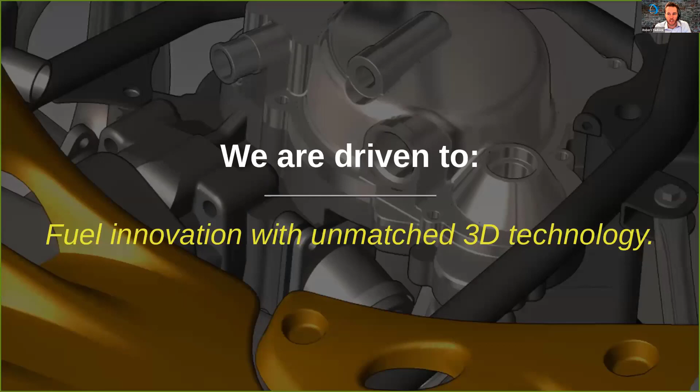A little background on TechSoft 3D: it's a group of passionate people, and we're pretty driven to fuel innovation with unmatched 3D technology. We do this by providing tools, expertise in various markets, and a tightly coupled partnership for each of our customers. Today we're going to be walking through building a simple web application with one of these tools, the Hoops web platform.

A quick note about the agenda: this is going to be a presenter-led training. We're going to pop up some exercises on the screen. You should have been granted access to the exercises before the call, and we're going to spend as little time as possible on slides. We're going to go over what you should expect from the session, and prerequisites if you plan on participating in the exercises.

We're going to do a quick introduction to the Hoops web platform, then a deeper overview of Hoops Communicator. We'll jump into the exercises, and any questions you didn't get to ask during the chat, we will circle back and answer at the end. Then we'll talk about next steps, or what I recommend you do from here.

As Jonathan mentioned, I'm going to shoot for about 45 minutes, plus or minus. We'll do as many of the exercises as we can, but by the time we get far enough along, it'll be pretty clear how you finish the exercises if you'd like to finish on your own.

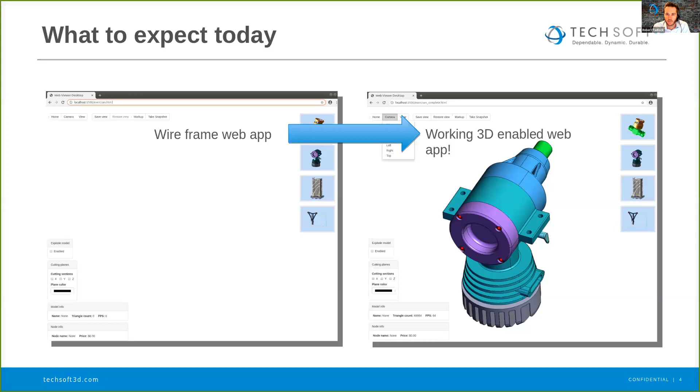So if you want to follow along, you're going to need a few things. You're going to need some kind of text editor or IDE for coding. You can use whatever you'd like, Notepad++, Visual Studio, Sublime Text, anything like that. I will be using VS Code personally, so that's what you'll be seeing. You'll need a web server of some sort, could be Apache, Nginx, IIS, some type of development server. There's a ton of them out there, Node.js. I personally will be using a plugin to Visual Studio Code, and I'll just turn that on at the beginning of the session, and it will be serving up the pages that we create.

And then you're going to want the latest version of Hoops Communicator, which you can get by following the link in the slides we'll be providing after, or the email sent to you before this talk has all of these links as well. And then last, you'll want the included exercises. These are some training materials we've built a few years ago, and also included with that is a VS Code project to get up and running, because there are some setup things you need to do to get Visual Studio Code working with Hoops Communicator.

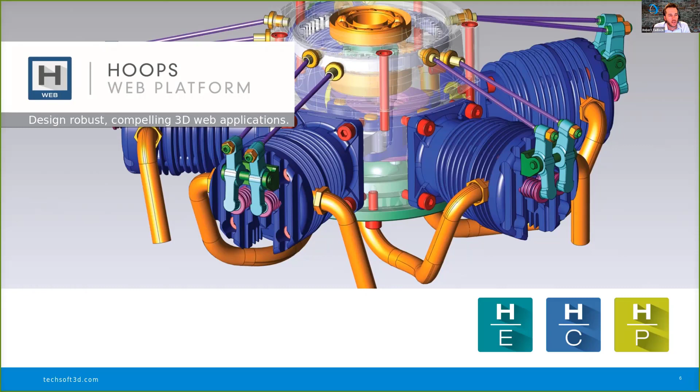So what is Hoops Communicator? This is included in the Hoops web platform, and it's the tool that allows users to author data into our online streaming file format called Stream Cache. You can either do direct authoring via a library that allows you to author the Stream Cache files directly without going through any kind of import process. This may be useful if you've got an application with your own proprietary file format, you can still author that directly into Hoops Communicator. We also offer the ability to import 30+ file formats via Hoops Exchange into Hoops Communicator Stream Cache.

The second part of Hoops Communicator is model visualization. So once you get that data imported into the tool, then you need a way to view it and interact with it, and that's the web viewer. That can be accomplished in two ways: direct file loading, where you can request these files over HTTP directly, pull down the entire file and view it in the browser, with no server requirements there.

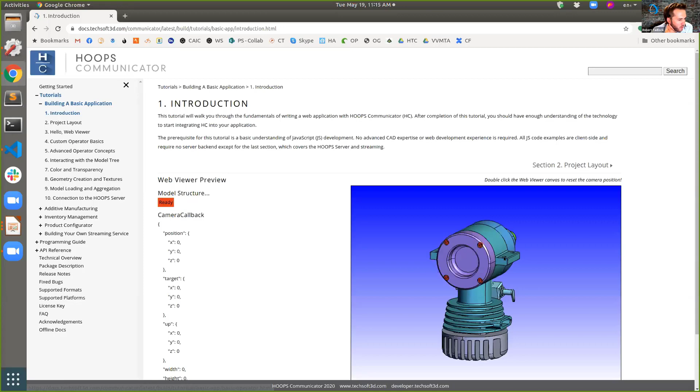Some of them have Communicator running right in them, and some are market vertical oriented, like additive manufacturing. We deliver all of this as source code, and you can work through these. You can use the code in your application, or use it for learning and training. So if you're thinking about building a new application, evaluating Hoops Communicator, or you're a current partner starting to work on that, have a look at these tutorials.

They're pretty useful. Then there's the programming guide here, and we're going to focus on that for a moment.

Communicator is broken down into really 3 logical chunks. We talked a little bit about the servers, the viewing, and the data import. And when we look at the package in just a second, you're going to notice we lay out the package in the same way. So depending on what you're doing, you can ask yourself, what part of the package am I in? What part of the components am I looking at? That can help guide you to the right area of the documentation.

So it's like, am I working with converter? I'm doing data import. Okay, we come over here to data import, and we see CAD conversion or authoring, which is what I mentioned earlier. Most users are going to be in the CAD conversion here, using the CAD conversion application, which we call converter.exe. This is an application that runs and allows you to specify a number of options.

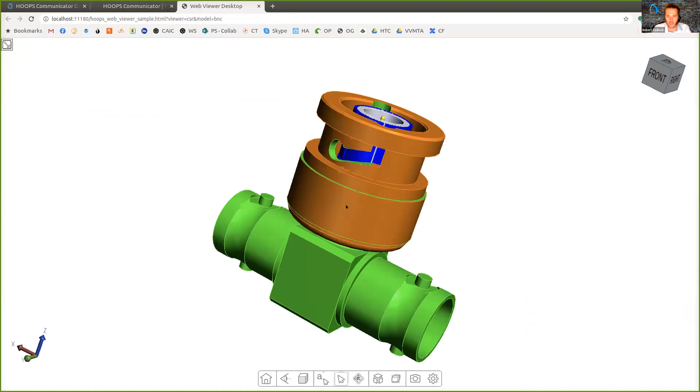So what you do from the QuickStart is we come to the index. If you open this up, you'll see we've got a bunch of different files here we can load. Anybody who's been around TechSoft for the last 20 years knows about BNC, so let's load the BNC connector, and we are now viewing this model. I'm interacting with it, selecting things. This is kind of a sample web viewer that we ship.

So you're free to use this application, use the code in here, these UI elements, all of that. There's a sample model browser in here, and that's what you're seeing here.

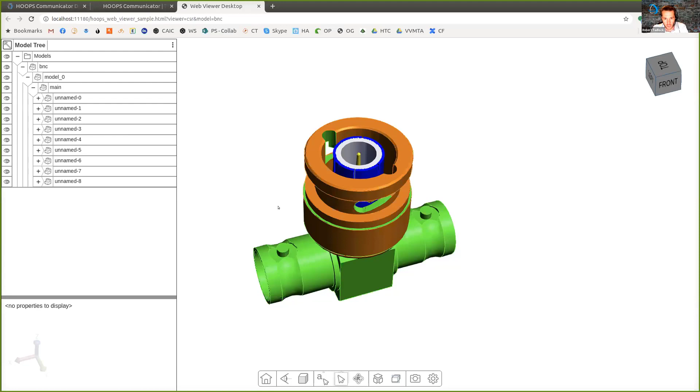What's nice about the QuickStart here is it's completely self-contained. When you start this up, we ship a small web app, web server. It's running the Hoops server, and as you access and load files, it's starting up streaming cache instances for you, and you're connecting to those. So this is the quickest way to get started with Communicator once you've got the package downloaded and installed. You come in here, you start the server up, and you can start poking around.

So there's a number of different files here. You can see PMI, you can load SCS or streaming. You can do server-side rendering as well, which I haven't mentioned yet, but to do that you have to have a GPU-enabled device. And then down here are some nice little sample code bites that you can consume.

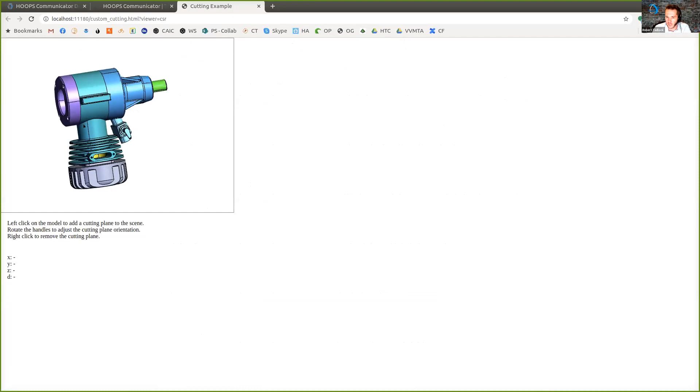What's nice about these is they are really small little bits of code. They're easy to read through, easy to understand. So like this one shows you how to use cutting planes, right? What's nice is you could just come in and grab sample code out of these and include them in your application.

And you can use the QuickStart to kind of come through the library and say, oh, what do I need to do? Do I want to do instancing, model switching? How do I do a basic minimal web viewer, right? And then we just provide you that code. So pretty straightforward, it's nice.

So what we're going to be doing today, and the reason I spent a little bit of time on the QuickStart, is the training that was provided to you - you just drop directly into this QuickStart here. So when you drop that in, some JavaScript files will get dropped in here, and also you'll see this exercise file, this microengine.json file, which we're using as like a mock database.

There's a README as well that shows you how to get this all up and running. It basically tells you to drop everything into wherever you installed it, and then once you've done that, you can come to the exercise folder. We'll do that in just a second.

So if we've got the QuickStart running, let me come back here. If I'm moving too quickly, just let Jonathan know, and if there's questions, please let him know. But you see, I still have this running.

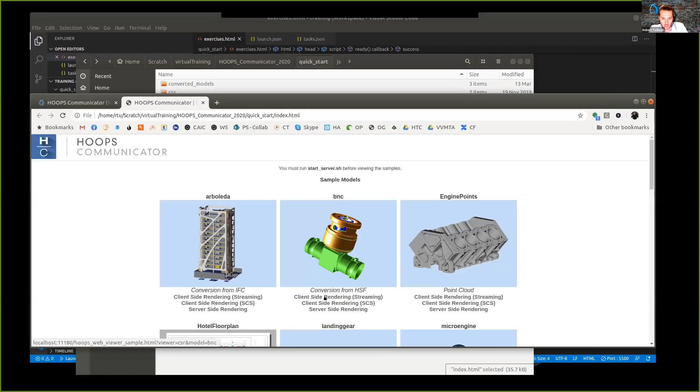If you're using the built-in web server here, like say you start the server, then you just go - you're going to come in here, run this, and this is running locally, no server. When I click on this, you'll see it's 11180 at the bottom - I don't know if you see that. If I click this, it's localhost 11180, but this is running a viewer sample. I also don't have the server running right now, so that's why that's not going there.

Let me step back and explain a little more before we go into what's going on here. We've got two servers: the web server, which I turned on as a plugin into Visual Studio. What's that going to do? All that's going to do is serve up my exercises.html on port 5500, because that's what it's configured at in my development environment. If I start right now, you'll see that.

This is no different than just running a web application or web page, an HTML web page, from a web server somewhere. So if you've got Apache running, you would put this exercises.html wherever you're serving your web pages from - like in the /var/www folder in Apache.

So that we can run and connect to streaming instances, we're also launching the QuickStart server here. This QuickStart server is what we just looked at in the QuickStart folder earlier - that's all I'm doing is running this, which, by the way, is running its own web server and all that. So you don't even need Visual Studio Code or anything - you can code right from here.

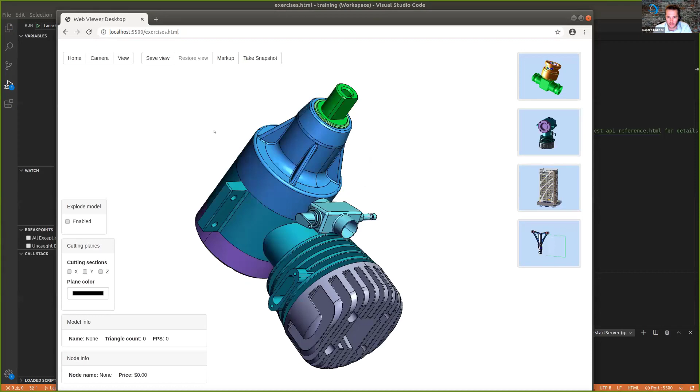And then the last thing we need to do is start the viewer. So that should be what we want to do here. Okay, if we're ready, let's see, I'll start this up. It's starting the stream cache server, it's loading the web page, and then voila, we've got the model loaded here, right? Pretty straightforward, pretty easy. We're just loading the model, connecting to a streaming cache server, reading a file, and streaming that down.

Now, where does this file live, and how are we getting it? We'll go to that next. So let's come back to the package here. We're in the package - again the QuickStart model, we've got converted models, I think you got standard here, SC models, and then you'll see we've got all of these engines we can load.

And by the way, you're seeing a different file extension here, SCZ. That is just the zipped version of SC, of streaming cache. So the streaming cache is a collection of files, and by default we zip them and call it SCZ.

So the way that when you start a streaming cache server, it needs to know where to find the models from. That's part of what the Hoops server is doing here. It's starting up the streaming server and telling it where the models that it can load live, basically giving it that directory I just showed you. Any of those files in there are available by name.

Okay, so now what we'll do is search for exercise 2. Let me stop this, and stop my server here, and we'll search for exercise 2. So everybody, let's come down into here, and we're going to work on this next.

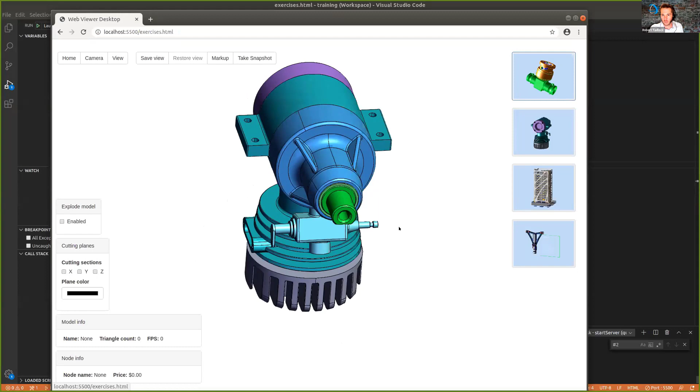So our model loads here, and all we've done now is basically, when you click on these, you can load a different model, right? We're replacing the model here. And then here we set...

You were also asked to override the PMI color and set it to black, and that's because we're on a white background, and by default it's white. So that way when you view this model, you don't see white text on white background.

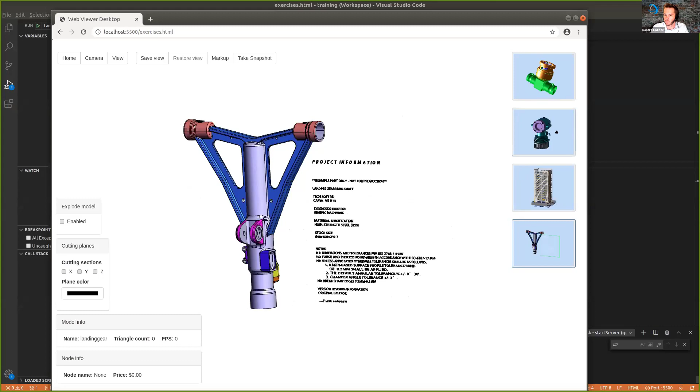So that's what this should be doing. Anybody having problems with that? Is that working for everyone?

And then we can look at the code here. I'm sorry, you might hear my cats trying to get into my office. I apologize for that, I'm working from home.

Okay, so let's look at the code here. We have a function called load model. If we search for this in the model, you see that I've written some code that adds an on-click event to anything with a thumbnail CSS class.

So those images have been assigned the .thumbnail CSS class, and we are preventing the default click. Then what are we doing? We are grabbing the attribute from that. So if we look at this in a second, that's basically the name. We've attached this class called thumbnail to this HTML object, and then we've attached an attribute, which is the name of the model we want to load. We're just passing that into the function we just created.

And then we are also updating something by its ID in the web page with the model name. I'm not sure what this points to - we'd have to look, it's some kind of HTML element, a div or the title or something like that. And then we're restoring the default operators, meaning we're resetting the viewer to the way it was initially instantiated. We can look at that function in a second.

So that's why when you filled this function out, it started working, because we already had the wiring in place - we just had to fill out the function. So what do we do here? Well, the first thing we're doing is checking to see that we got something actually passed into the function. And then if we did, as I mentioned earlier, it's on the model class.

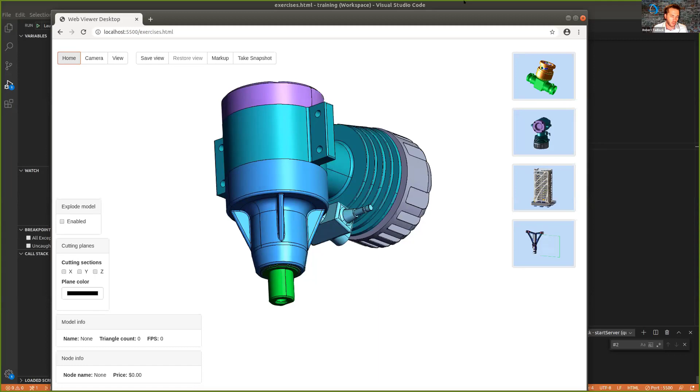But then once you get that all in place, actually using the web viewer is pretty straightforward. It's a nice JavaScript API. You've got a searchable API document, and then you just kind of figure it out and play around with it and go from there.

So let's move on to the next exercise here. We'll search for number 4. Right there — so this one's a little bit longer. We want to set the view orientation here. So if we look at, let's come back here — so this is camera options, and there's a list of camera options.

Let's come back and let me start the web app up again, and I'll show you this. So the idea here for this exercise is that we want all of these options right here to be hooked up. So what I've done here is I've purposely made these names match the text that needs to be passed into the enumeration. So let's go ahead and look at the...

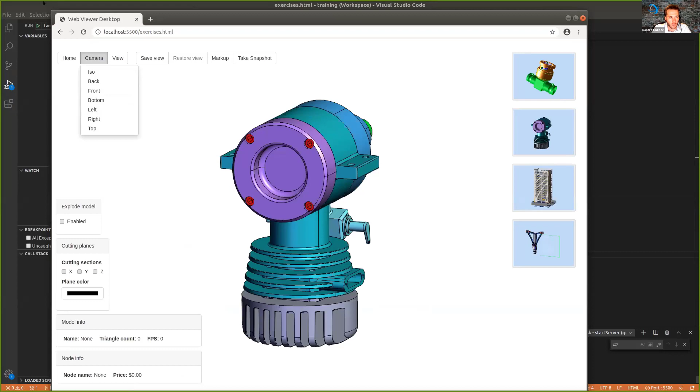Let me get the right one here. So I think it was — let's see. So if we do like isometric, so we search... right, so you see view orientation. So come look at, get started here. This is what we're going to be passing in. So you want to hook those up to this enumeration, and you want to use the function that changes the view orientation. So let's code that up, and then we'll have a look at the code.

And Jonathan, let me know how we're doing on time here. I think I'm running over, but you let me know if we've got a bit more time. You know, maybe we can — you're doing awesome.

Thanks, Rob. There's a lot of content there. I know this was part of a multi-session training course. Let's open it up to some questions. We launched the web viewer, we showed them the view class, the model class, the camera class. I think that's a really fantastic start.

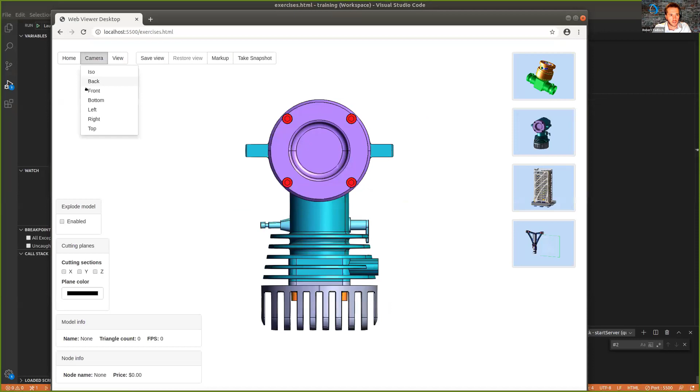This one is going to be a very similar exercise, although not quite as contrived, so you will have to do like maybe a switch statement or something in there. But other than that, it's pretty straightforward.

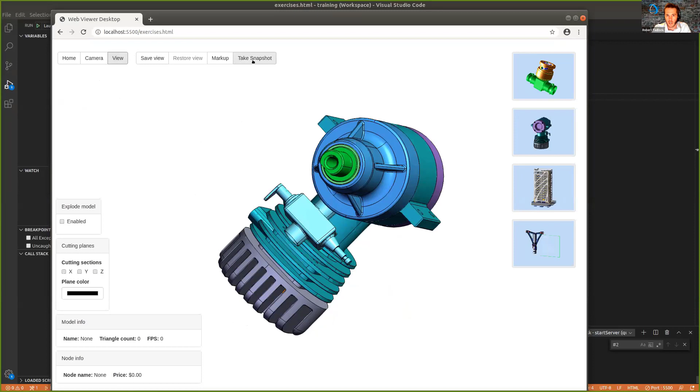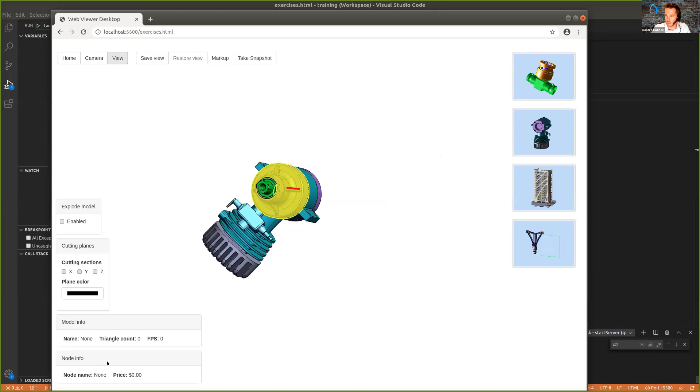And then you work through the rest of this exercise. You're going to work through creating markups, so how to create and save markups, save markup views, how to take a snapshot image. You'll set up cutting planes, the explosion operator. We'll start to look at the triangle count of the model, the frames per second we're getting. And then we have a little exercise where you click something and we tie it into something in your application database, like pricing and the name, things that would be stored in another system. And then that's about it as far as this exercise goes.

Great, thanks Rob. We got a lot there—probably enough for a whole other session, huh? Yeah, there's a lot here.

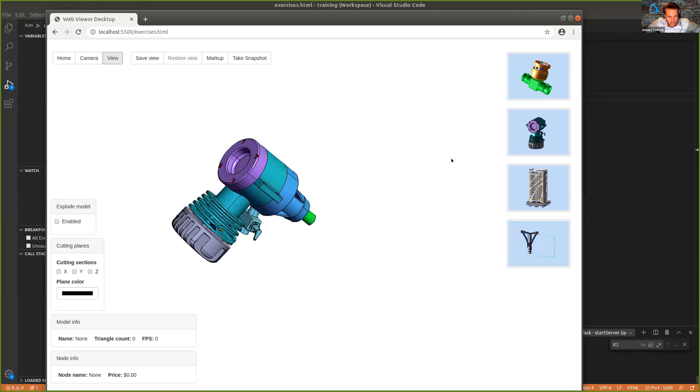Like you said, this is generally something we work through over the course of about a half day in person with people, usually in a class setting. This would be like your general introduction to Communicator, and after that we could have a consulting engineer come on site with you specifically and work through your very specific application questions and code and things like that.

So I think that was a question: can you review your source code lastly? I think we were able to accomplish that.

Is there any limitation to the size of an SC file? That's a good question. One thing to keep in mind is when you go from a CAD file, which tends to have a lot of bloat in terms of historical modeling information, the SC file is immediately much smaller than the original CAD file. We can see a reduction of, let's say, 80% of the file size. So if you have a 100 megabyte CAD assembly, it gets pushed down to 20 megabytes when it comes to an SC file, or even less, depending on the type of conversion parameters you include and how we do that.

Outside of that, the largest SC files we've seen—there's kind of a test data set, the Boeing 777 that Boeing created for us. It was originally, I believe, a 30 gigabyte CATIA model. We're able to visualize that. We do some interesting things on the client side, even though the SC file ends up being like 4 gigabytes in size by the time we're done working with it.